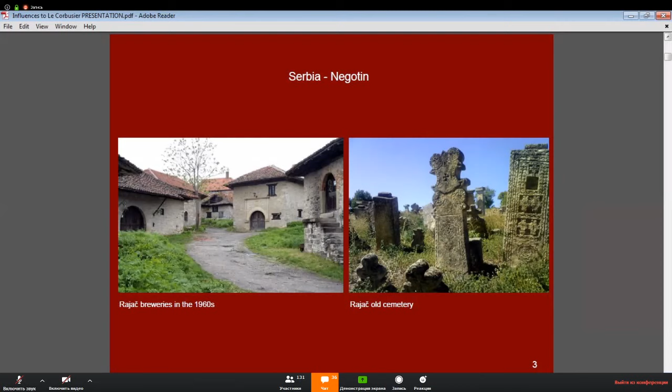The course taken by the two fellow travelers was not smooth. Started from Bucharest, they crossed the Danube on Bulgarian soil. From there, they continued by train to Veliko Trnovo, from where the railway line reached as far as Gabrovo, and there it stopped. The vertical connection that would cross the difficult passage through the Balkan mountain range had not yet been implemented.

Therefore, they continued from Gabrovo by post horses and carts, following the winding, steep, and rough road to Kazanlak and Stara Zagora, and from there continued and reached Adrianople.

Veliko Trnovo is a city on which young Jeanneret devoted numerous sketches, studying the interior layout of townhouses and making representative drawings of the city and of its historical quarter. The Yantra River winds through and around Trnovo in such a way as to make a position of great natural strength and beauty.

Let us go now to analysis of the Villa Schwab, also Villa Turk. The house is located in Le Corbusier's hometown in Switzerland. The villa was commissioned in 1912 and completed in 1916. According to scholars, the villa is thought to have been built in Oriental style, while its plan shows the effects of the Yalis layout, the traditional houses on the Bosporus in Istanbul.

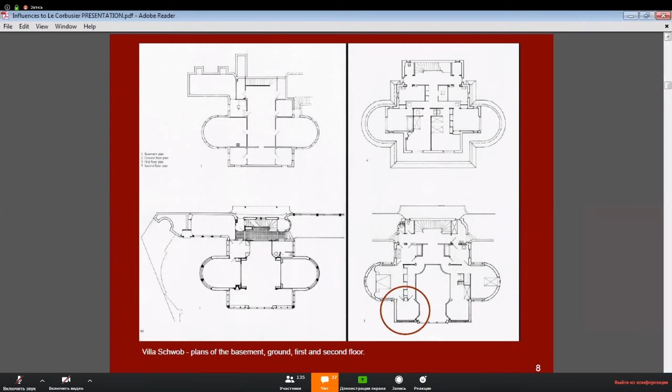On the ground floor, the central area is occupied by a two-story room. In the resulting cross-shaped form, the front corner spaces are incorporated as an extension of the living room. This arrangement brings to mind the cross-shaped plan of the developed Balkan symmetrical house as it was formed in the wealthy mansions of the Balkans and the Yalis layout in Istanbul.

Symmetrical traditional Balkan houses are distinguished by their basic tendency to group spaces around the central living room and by the functional relations among them. The main axis always passes through the lobby, and this rule contributes to the monumental character of the architecture of their interior. The cross-vertical axis acquires almost equal importance thereafter.

From a compositional point of view, in Villa Schwab, the central space is the lobby, which goes through two floors as a closed patio, forming a third axis of symmetry, this time vertical, around which closed and open spaces and various surfaces are composed. In Villa Schwab, the central space extends dynamically far to the side antennas of the cross, forming two almost open semicircular spaces.

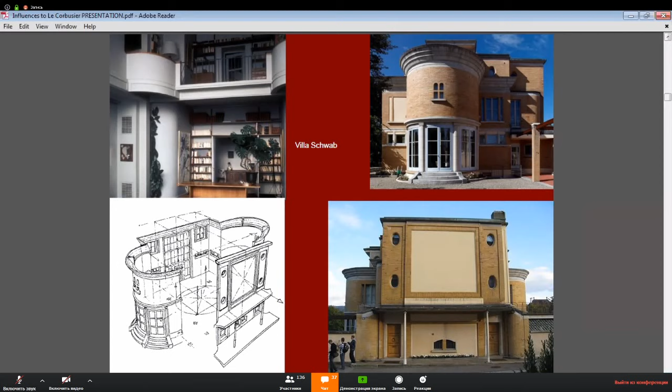Jeanneret made use of this projecting semi-cylindrical element in his first independent project in 1912, designed for his parents. Scholars highlight only the effect of Frank Lloyd Wright's architecture on these elements.

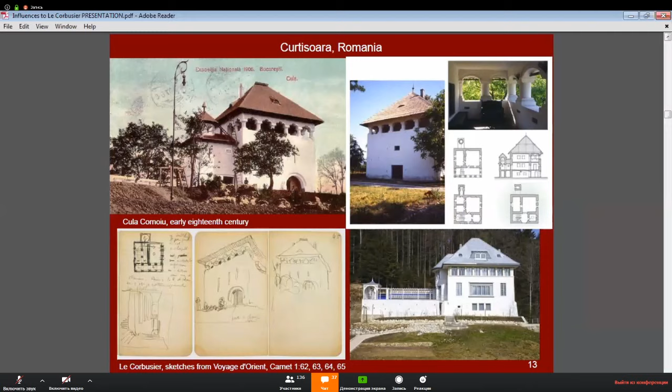However, it has been rightly observed that the effects from the Romanian Curtisoara fortified house that he visited are just as important. A parallel inspiration might have come from the series of windows that grow in a semicircular configuration and in conjunction with continuous semicircular sitting places as found in the lounges of the Balkan Oriental houses.

Let us go to an iconic monument from the Bulgarian National Revival period in which we find the same layout of the interior. This is the house and workplace of Dimos Sarafina in Veliko Ternovo. The house, for which there is no certain evidence that it was visited by young Jeanneret, was built in 1861, in a dominant place of the city.

The sloping terrain required the building to be built on the street on 2 floors and over the Yantra River on 5 floors.

The representative rooms are located on the 2 upper floors. The lobby is rectangular in shape, with beveled corners at the end of which are placed doors for the rooms. The dining room is in the middle of them, in a semicircular extension of the lobby, spread out over the wide row of windows overlooking the river. In the layout of the house, the lobby is the central room, which in height goes through 2 floors.

On the 5th floor, the ring rooms become an open gallery, decorated with a railing of wooden columns with carved iron rods. Coming back to Villa Schwab, the hermetically closed and straight shape of the spaces at the end of the corridor and in the corners of the square raise morphological questions. In our opinion, here we have the transfer of the element well known from the facades of the traditional Balkan houses, and in particular the closed shahnishin, but this time inside the living room, from outside inside. Its strange shape testifies to its origin.

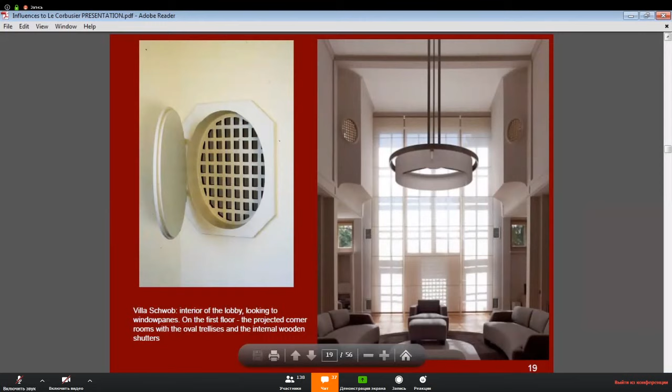The wooden musandra, a closet for the storage of night bedding, is placed at the entrance of the lounge. Its crossing is necessary to access the large room with the fireplace and the decorative ceiling, where guests were welcomed. Above the musandra is the mafil, a space overlooking the room, and when open, is the place for the musicians. However, in Muslim houses, the mafil is often closed and accessed via a small wooden staircase through the musandra from the back corridor.

Just there, Muslim women and children used to sit and eat without being seen, watching through windows covered by trellises or round glass openings the men in the lounge celebrating or receiving foreigners, or even the man negotiated for marriage.

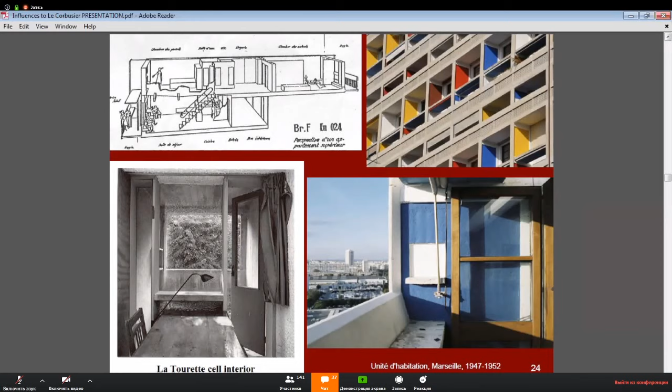The apartments, as in Marseille, show exactly the same arrangement. The monk cells at the monastery of La Tourette, near Lyon, completed in 1961, are laid out in a similar but more modest way. In another sketch, he analyzes again the relationship between inside and outside spaces, in which the staircase is getting up from the ground floor to the roofed veranda.

Kazanlak, located near the foot of the Balkan Mountains range, is the center of rose oil extraction in Bulgaria.

Kula, the ethnographic complex, preserves some of the oldest houses in the core of the old city. In the courtyard, within a garden, is a rural ground floor residence impressive with its functionality and simplicity, providing similarities with the house sketched by Le Corbusier.

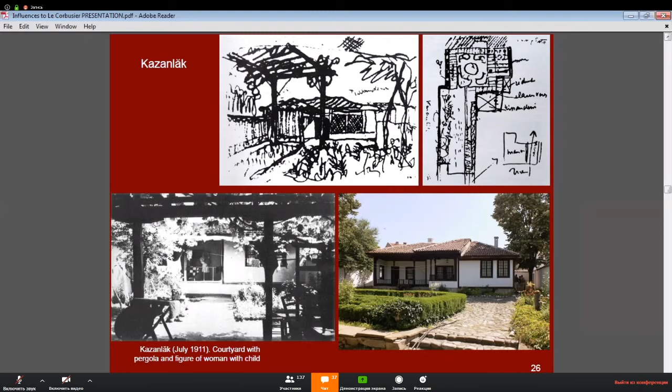The attention of young Le Corbusier was drawn to the construction methods and the form of the vernacular Oriental house of the Balkan Peninsula. In his sketch, he accurately depicted many of its basic features.

The building represents a typical structural system comprising an assembly of a timber skeleton. The foundations are made of stone and are visible. Horizontal beams are well elevated at distances along the wall. The roof structure is made of timber.

Particularly, he notes the presence of the projecting polygonal bay window on the first floor, covered by trellises to protect domestic life from the gaze of strangers. The entrance is through a large door leading to the courtyard.

A single wooden staircase connects the courtyard or ground floor and the first floor. The first steps are generally made of dressed stone blocks to protect them from moisture and rainwater.

We found this detail on the staircase at the central entrance of the elevated ground floor of the Weissenhof single-room houses 14 and 15, designed by Le Corbusier and his cousin Pierre Jeanneret in 1926, as a morphological element here.

Le Corbusier observes the relation of the street as a public place to the private and closed space of the traditional house. On the streets, the severe facade of the house appears, which, however, on the upper floor shows a tumultuous interplay, the shahnishin projecting with morphologically rich and slightly organized openings.

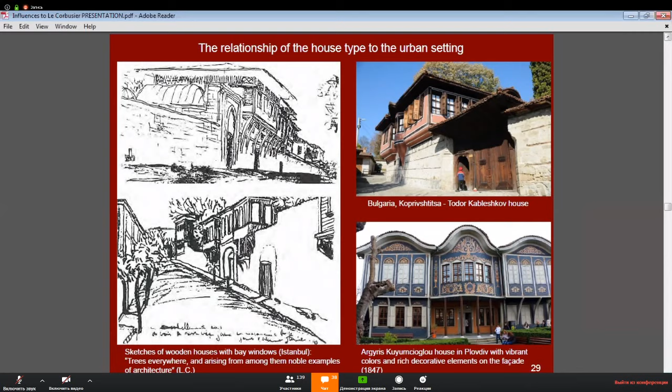Le Corbusier admires the splendor of the great houses called konaks, characterizing them as architectural masterpieces.

We would like to stress the resemblance between the house he sketched and the Kutev house in Kazanlak, a town where he stayed for two weeks, which was built by the same master craftsman who built the impressive Dimitar Georgiades house in Plovdiv.

Contrary to what has been written about the supposed whiteness of the traditional houses that Le Corbusier saw and was impressed by during his journey to the Balkans, it should be emphasized that this condition never existed to the extent that he found, and much more to the extent that it was admired by his scholars.

What comes out of his color sketches is precisely the sense of intense color that has mostly characterized the high-class representative houses in the Balkans.

Consequently, it is the Balkan and Oriental tradition of strong color use that characterizes the facades and interiors of houses and mosques.

This is where we should look for an additional possible source of inspiration for his subsequent searches and applications of vibrant earthy colors in the apartment facades at the Marseille Unité and his later architectural works.

Zagora was the biggest town in today's Bulgarian territory, but it was totally destroyed by the Turkish army during the Russo-Turkish War in 1877. Lubor Bayer was a construction technician, a master designer of the new plan of the city.

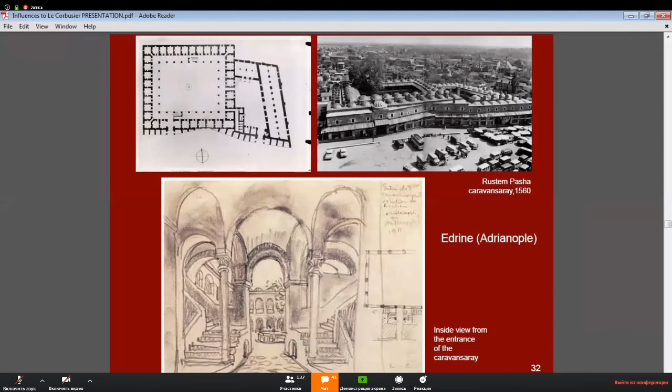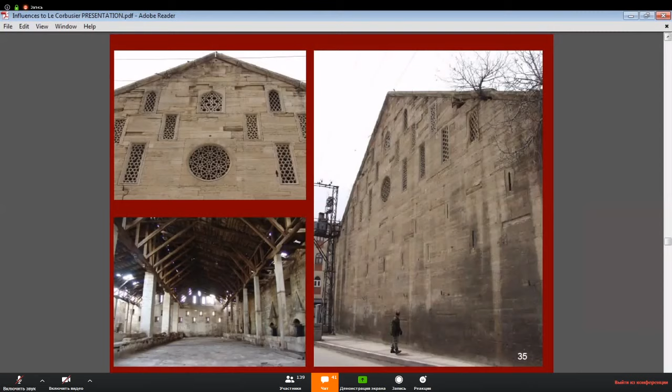We want to pay attention to the large Ekmekçioğlu Ahmed Pasha Caravanserai, built by order of Sultan Ahmed I, designed by the same architect responsible for the Blue Mosque in Istanbul. The structure has two separate wings connected by a central part. The interior of each wing is quite dark, illuminated only by windows open to the walls on the narrow sides. The large east wall gives the impression of a heavy, dark curtain pierced by narrow strips of colored light, allowed to pass in controlled quantities through the colorful windows.

The overall picture inside the caravanserai is so striking that it gives birth to the idea that the young Le Corbusier is likely to have noticed this impressive interior atmosphere. It is possible that this image came back to his memory when sketching the famous perforated wall in Ronchamp Chapel after a whole 40 years.

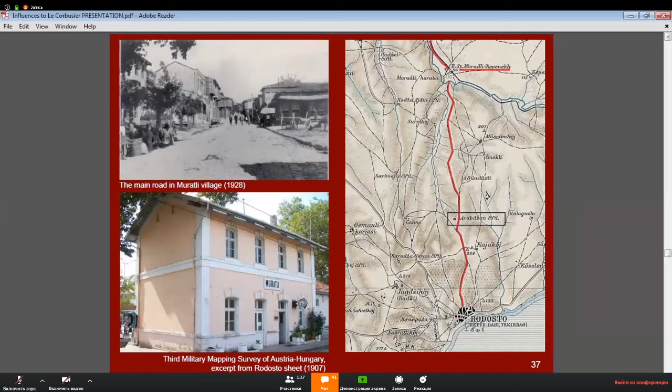The Ottoman railway line was starting from Edirne. Muratlı was a small railway station, but of importance, as from there a 22 kilometer long road led by the shortest connection from inland to the Marmara Sea, to the port of Tekirdağ, the second big city in Edirne Vilayet. Jeanneret and Klipstein, on their way, passed by a Turkish chiflik, dominated by a tower house.

The property was bordered by a wall all around. The residence was surrounded by a high wall fence consisting of the exterior walls of the auxiliary buildings of the complex. The main building was a big kula, a defense tower. The image of the fortified residence impressed young Le Corbusier, who had it drawn and visited the yard interior.

A much better picture of what these complexes represented we can acquire from old photographs of identical chifliks that existed in the same area, found in the Russian Army's archives of the Russian-Turkish War of 1877-78. On the first photograph, there are visible box machicolations of supporting corbels of the upper floor. The second photograph provides a closer picture of the only entrance to another chiflik, through a gate well protected by a guardhouse. Certainly, both are similar to what young Le Corbusier saw on his route from Muratlı to Tekirdağ.

The chifliks were located near Küçükçekmece Bridge. The second photograph presents the San Stefano chiflik. The photographs were taken after the Treaty of San Stefano, July-August 1878, during or shortly after the end of the Berlin Conference, before Russian troops withdrew from the area.

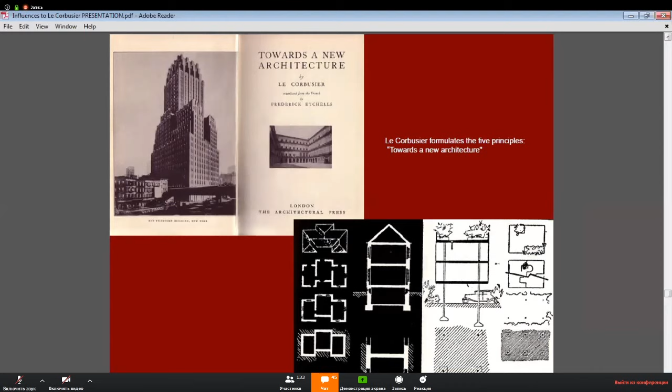However, some of the qualities of his 5-point manifesto could well have been formulated during his early journey to the Balkans. The concept of the prolonged unified window, opening widely and indivisibly to the view, used to be a constituent element of Ottoman secular architectural morphology.

The oldest surviving example to date of the famous Yalı houses is the assembly room of the men's quarters of the Amcazade Hüseyin Pasha Yalısı, constructed to house the Austrian ambassador after the Treaty of Karlowitz, as early as the very end of the 17th century, supported on wooden pillars over the sea waters. It provides unobstructed views towards the Bosphorus through strip ribbon windows placed in a row at the eye level of a person seated at the window-side sofas.

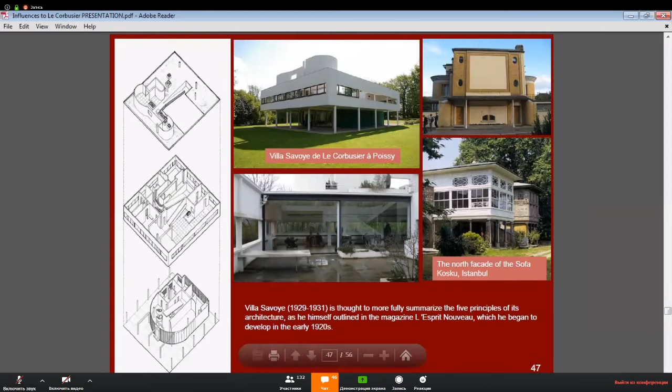Scholars have long observed the widespread use of elegant wooden pillars in the traditional wooden yalis of the Bosphorus, on which the living room extends out of the main volume of the mansion, lifted above the ground plane. The impression is further enhanced in the imperial buildings of the Sultan's Palace in Topkapı. The north facade of the Sofa Köşkü provides a brilliant example of the realization, by official Ottoman architecture, of both construction methods which will be among Le Corbusier's modern architecture basic principles.

The setback arises from the need to build in correct geometric forms, to expand the floor area and to create conditions of better functional organization of structure and aesthetics of the premises.

It also visually connects the house to the street. Extending well beyond the ground floor, a bay window hangs over the street, allowing householders to observe the entire length of traffic through side windows.

The bay window is also of great importance in shaping the architectural picture of the whole ensemble on the street and the city. The houses involved provide first-class examples of projected bay windows in successive rows on timber construction buildings.

Similar examples of bay windows should have impressed Le Corbusier in Istanbul as well. Consequently, these examples should have influenced him in designing the large-scale projected bay windows for the facades of La Tourette convent near Lyon, and also the effect of turned sideways windows as brise-soleil in the Marseille apartment buildings and at the Carpenter Arts Center at Harvard University in Cambridge, Massachusetts.

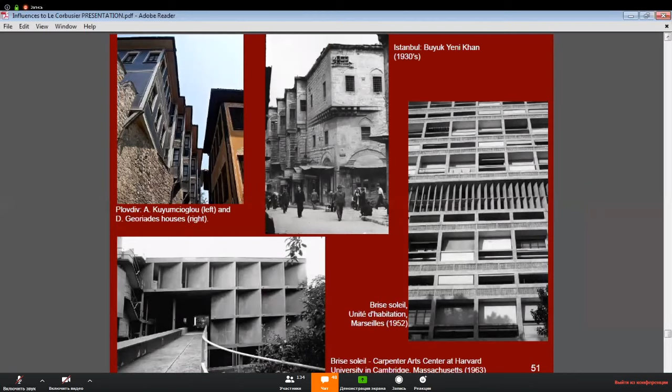In Istanbul, he was very much impressed by the gigantic Ottoman monuments and devoted much of his long stay there to visiting and studying them. He stayed about 7 weeks there. I will stop my presentation with this example.

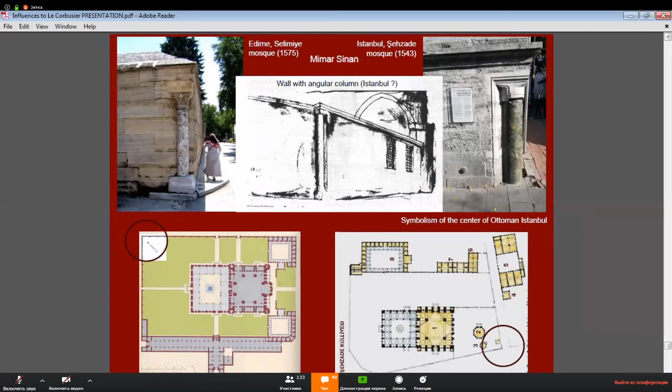These columns did not have only a symbolical meaning. They also had a high technical use because they were free to move all around, and it was a very bad signal if this moving was not able to be realized. That was a signal of an earthquake, and they had to take care of the building.

It was an old technique used in Ottoman architecture, and we see it in another early construction of a mosque in Edirne from the mid 15th century. What is very important here is the assumption that the angular column most likely inspired him to place an iron pillar, which offers virtually nothing from the static point of view, at the corner end of the ground floor building in the Villa Ternisien, another one of his early works. So the similarity is remarkable.

Conclusions. What we have tried to suggest in this presentation is a different interpretation and perspective of Le Corbusier's observations and influences through his journey to the East, a perspective that acknowledges the need for a deeper analysis of the specific historical and cultural environment that Le Corbusier came in contact with in the Balkan region.

This kind of analysis is necessary to understand which elements were selected as more interesting and influenced his later architectural creations, since the Balkans represented a different, more exotic and unknown cultural reality than the one he encountered in the European capitals. It is striking that young Jeanneret was so deeply impressed by architectural elements and compositional relations of the traditional houses of the Balkan Peninsula that he attempted to introduce them, either as synthetic principles for the layout or as individual morphological and structural elements, even in his first architectural creations following his return home.

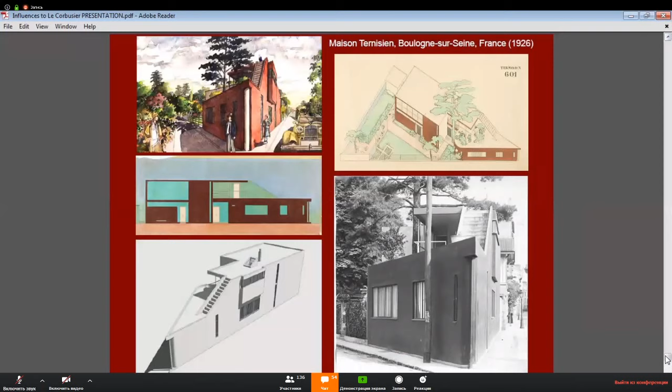So the first question is: can Le Corbusier's ideas be used today, and how can they be reformed? Thanks for the lecture. So how can his ideas be reformed and used today?

Of course, he introduced revolutionary ideas for his time, and their method—the way of seeing relations and space—guides our studies today. What I try to analyze is the influences, why he selected exactly these elements, and how they were later introduced into his work.

Okay, thank you. The next question: what project of Le Corbusier shows the most principles of architectural space from the Balkans period? What projects show the most principles?

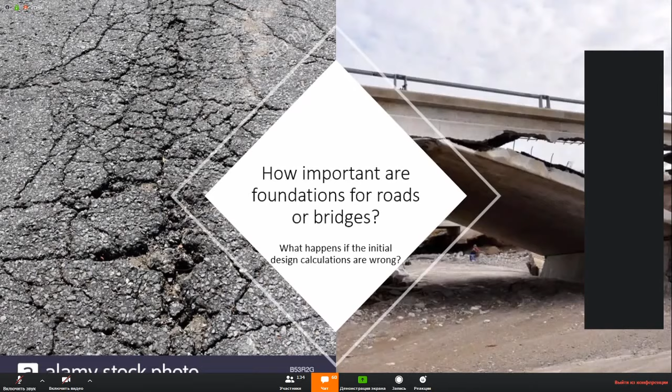Typically, as an engineer, we're looking at the modulus of the ground. People will take a CBR reading or go for a modulus reading. In a road, more than a bridge, it's extremely critical to get the CBR or modulus correct—without it being correct, there are technical failures that are impossible to determine.

Over the years, axle loads on roads and bridges have increased significantly. Although the road, and to some extent the bridge piers, are designed to transfer the load down into the ground, if the design of the ground or subbase is incorrect, the load can't transfer correctly. That's why you see an awful lot of failures in the road, such as rutting, and in bridge decks you'll see cracking and other things appearing.

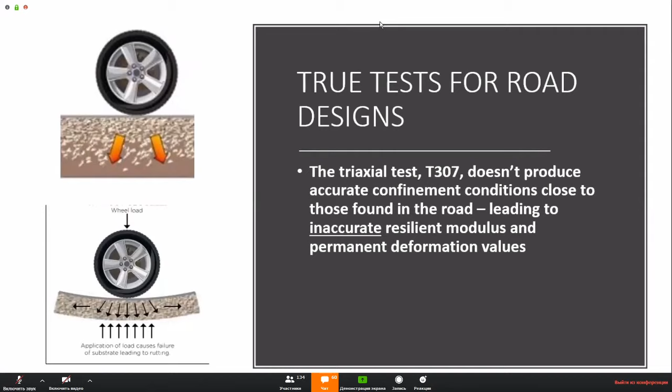Typically, in Europe especially, we tend to use a triaxial test rather than the physical CBR. We tend to do calculations rather than based on theory. But even then, the resilient modulus has been incorrectly calculated because of the equipment we're currently using.

In a road, you'll see that creates a rut. In a bridge, it creates problems with the foundations. We used to notice it especially where the bridge abutment met the approaching road. Any settlement beyond the calculation left a difference between the two levels, and it changed over a period of time. So as an engineer, it became a historical problem of how we could correct this design.

There is a machine that was really designed at Cooper Research Technology, called an unbound material analyzer. It's basically a machine that is designed to replicate real conditions out in the road.

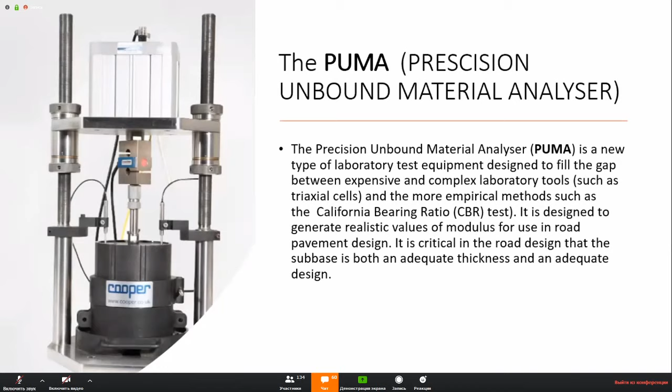It's very simple, very small, 150 mil diameter, bigger than a CBR mold, and different to a triaxial mold. It's putting a universal testing machine with pulses to try to replicate what actually is happening in a road. A CBR is just a single load. A triaxial also uses pulses, but the Puma gives pulses to act as though a wheel is going over it. These different sizes of machines depend on whether you're using larger or smaller material.

The main difference is that in a CBR mold, the mold is solid. So when you're compressing, the side of the CBR mold restrains the actual movement of the soil. This is not real in the industry. If you go out in the field, the ground is not restrained.

As a quick example I use a lot, it's like an orange. If I press the orange with the orange skin, the resistance I have is very, very large. If I remove the orange skin and press again, it compresses and also expands out. So research was done to make a mold that either expanded that way or that way, depending on the load and the contents of the ground.

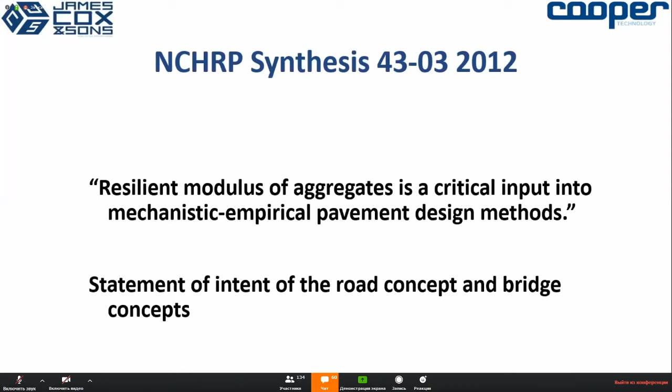The statement from the American system was that the resilient modulus is critical, and therefore it has to be correct because it's part of the pavement design and part of the bridge design. So with those bases in mind, we had to carry out the project research.

Rather than talking about a road and a bridge, for now I just want to talk about a road, because the analysis is the same, but the research gives different results, and on a road it's a lot easier to see the results than actually on a bridge deck.

We asked a lot of designers, mainly in the United States and the United Kingdom, how they determine the resilient modulus or the CBR value of the ground of our road. We got a series of different answers. A lot of people told us they use CBR. It's a simple formula they took from a chart on a paper.

Some of them also took resilient modulus in the laboratory, which is basically a triaxial test. And it was interesting, some of the designers were using both of them. Yet when they used both of the answers, they had different results, and that affected the design parameter.

I had this problem on a bridge we were designing in Thailand, and we finished up with an engineering team in Thailand working on a CBR, and the design team back in London working on a resilient modulus, and we had a variation that actually caused complication in the initial design.

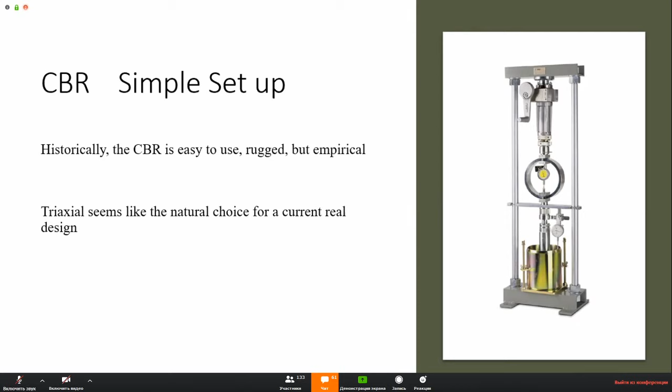So a lot of people moved from CBR to a triaxial test because it was supposed to be more real than CBR. A triaxial test is, as you can see, extremely difficult to do. It's very complicated to put together. As a nature, it needs a technician that knows what he's doing. A CBR test, anybody can really do very quickly. A triaxial test is, by nature, a very difficult test to carry out.

With the United States, we were doing a resilient modulus test with the triaxial because they wanted to analyze what was going on, and they were very specific in the pulse loads and very specific of how we actually loaded it. So the AASHTO version and the EN version were, for us, different, and we had to design machines to operate in both.

When we finished it, we found that there was a lot of difference between state of the art and practices of what was going on. The resilient modulus is a critical part of a design. A lot of it's been around for a fair period of time.

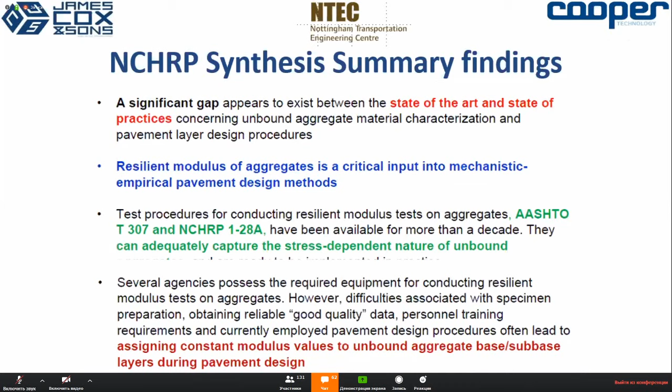But the biggest problem we had was that although people had the ability to do the tests, they had significant problems with the data, with the personnel training, some of the country requirements, and they found that the tests were not uniformly carried out, even on the same material. So two laboratories would have a different result on the same material than another laboratory. So we had to analyse what was going on, because we still have these road failures.

Of course, we looked at the factors that affect the road, sub-base mainly, and of course the primary factor is the applied stress, the lorries, the cars, the traffic that's going over it. But we also spent a lot of time analysing the densities, the fine contents, the moisture contents. And in the colder countries, we had to look at the freeze-thaw effects.

Russia especially was going to have the same problem. Not so much here in the United Kingdom anymore, and not so much in the United States with Florida and everything else. But we had to look at it as a factor. So we did the research behind it.

And what we found was that a lot of times the confining stress was never less than 20 kilopascals, which historically gave us a higher modulus of stiffness, rather than if we did it by another method, such as a falling weight. So we had to research into what we could do to overcome this particular problem.

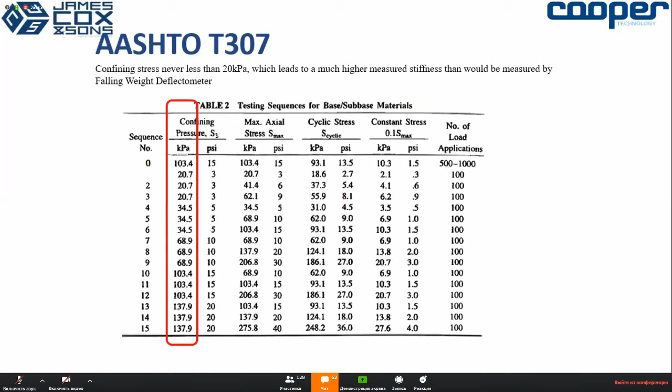Of course, we finished up with the question, how important is this unbound layer? So we chose two examples. We chose a thin asphalt, 100 mil thick basically, and we chose a thick asphalt, 200 mil thick. And we varied the base modulus. We were curious what would happen in the different traffic areas.

On the calculations, the predictions came out. We used a base modulus of 1,000 to do the initial calculations. A thin asphalt layer of 100 millimeters with a 1,000 megapascal base layer was very weak. After 380,000 passes, the asphalt was already failing. A thicker asphalt, because of its nature, we could get 20 million, but it was based on that assumption and that calculation.

We did the graphs based on the presumptions that we calculated to work out the fatigue life of the thin and the thick asphalt. Clearly, the thick asphalt's fatigue life is a lot bigger, a lot longer, depending on the stiffness of the modulus, because it's twice as thick as an asphalt layer. But we have the curves, and these curves were from calculations.

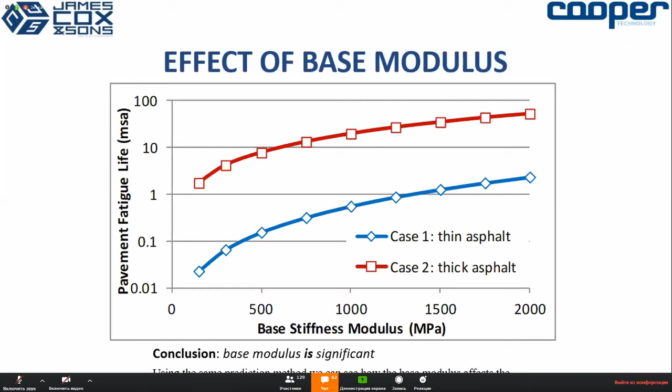So we wanted to check the overall fatigue life. So we increased the compressive stress, and we calculated the compressive stress against the horizontal stresses using the different moduluses. Don't forget, these were all based on calculations, based on a triaxial test or based on a CBR. So we were curious what the results were, and we finished off being able to plot the graphs. Of course, the thin stuff is very weak.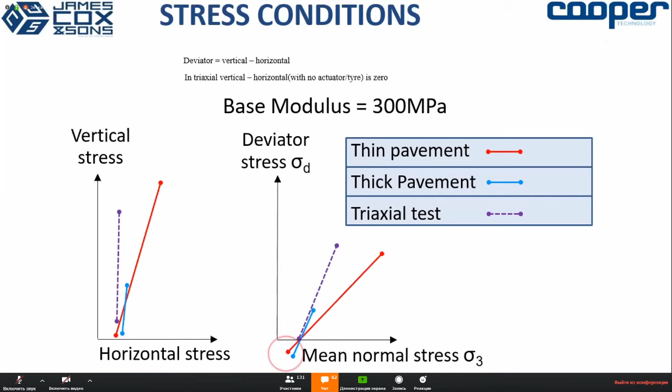So we then put the Puma, the precision unbound material analyzer, to the test. We wanted to check a thick and a thin layer to see what actual stress we were creating during the test as against our calculated stress. Straight away you can see the difference in vertical stress the Puma was picking up, because the Puma is no longer bound by the side walls of the CBR, and by the nature of the triaxial test it's allowed to freely move. So the vertical stresses, especially on the red thin pavement layer, were significant as the load was increased.

By the nature of the calculations, we had to build in a factor of friction for the mold. 0.5 was historically chosen as the nature of the mold. So we needed to check the difference between a mold with a coefficient of friction and an unbound mold such as the Puma.

So we finished up with the same graph, but with the Puma results. You can see the Puma results differ from the triaxial results and from the calculation results. This became really important in the actual design of the road, because using the equation from the triaxial test and looking at the various stress layers, we found that we were using, as a designer and for me as an engineer building it, incorrect data. With this incorrect data, the abutments at the bridges had a tendency to not be as we initially thought in the design, and as a road we have, and always will have until it's corrected, significant failures.

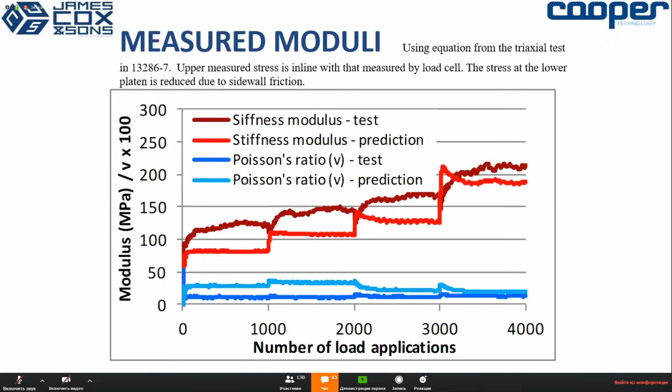When we corrected the stresses, you can see the red is the thin pavement and the blue is the thicker pavement. When we corrected the stress calculations with the results from the Puma, the results were dramatically very different. Thicker pavement, which people don't theoretically use anymore, was okay. When people went to a thinner pavement, the actual vertical stress measured against what was calculated showed a significant difference, which would really alter the life of that road. So we had to correct the modulus.

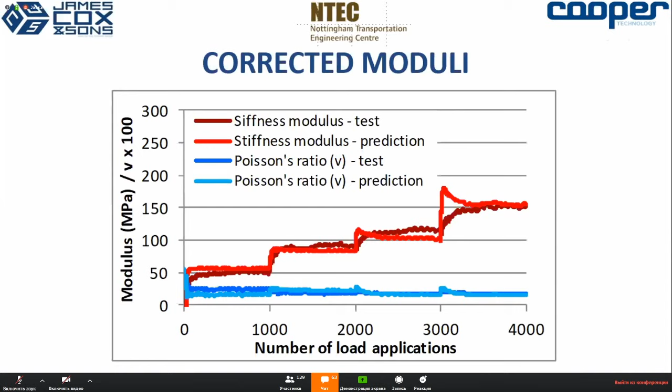Again, in the calculations, we used the predicted load as against the tested load, and we found that the variations were evened out a lot more once we used the Puma. So with the Puma, our predicted load and our tested load became more accurate.

Just to compare the modulus, the triaxial test that people use, confinement is important to road designers. Suppliers of aggregates for roads, especially on thinner pavements, would like a higher value, so they prefer these results to be higher. From the calculations, they were predicting 157 and 95 in our design loads, but if you look at the test results, the actual modulus was lower, and the triaxial load was given a higher modulus. So for an engineer designing this road, the data we were receiving from CBR, predicted values, and triaxial was actually incorrect.

When we used the Puma, we could then change the actual load amount against the stress, and we could increase, therefore, what was going on in the road and get a much more accurate road design.

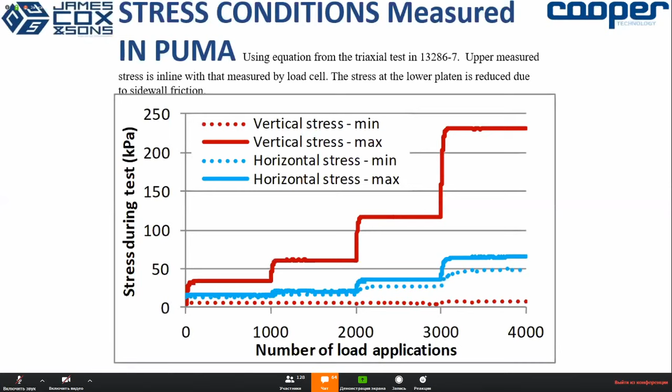An example of this is in the United Kingdom with railway ballast. We put large stone underneath the railway tracks. The same machine is being used to test the ballast for the new HS2 railway, and they found that the calculation was incorrect, so in actual fact they could reduce the thickness of the ballast on the railway line, which gave a cost saving, especially over 300 kilometres, of a significant amount of money. But they could only do this by taking a real test, not a calculated one.

There is a YouTube video so people can watch. That's the machine, a very simple, very small machine. It takes up very little space in the laboratory, but it's a quick way of doing the test now. It's a very, very simple test.

With the national highways in the United States and their tests, they use this Puma, and I believe in 2021, now it's delayed because of the virus, they are going to put an unbound test as part of the ASTM standards.

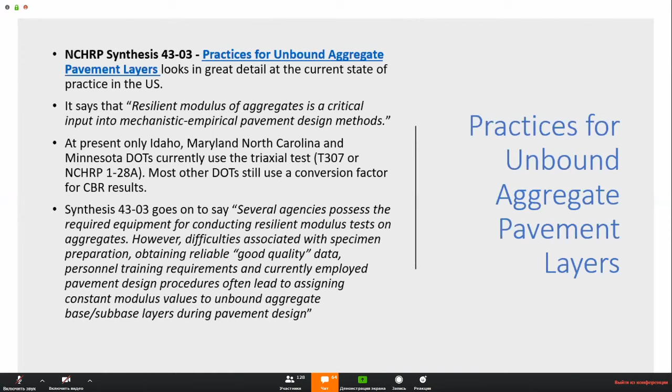So we concluded after a lot of research that the modulus of the base pavement is important. It depends on a lot of different stress conditions, but when you use an analytical pavement design, they have to be correct. The end result of all the research with all the laboratories was that we had to basically change to an unbound material analyzer, and rely on the Puma, because we needed more accurate modulus values than you can get on CBR and more than a triaxial.

It allows the road to be designed so it can actually be either thinner in base, or if needed, thicker, depending on the actual results given from the particular site. Same issue on a bridge deck, where the bridge was meeting the abutments and the runoff tracks where the expansion joints were. We therefore began to understand why the ground was moving.

Very quickly, other people have taken it on further and done research on the Puma. This one was done over in the Chinese zone. Again, they got different loads. They were checking the results that they received compared with the results that were expected, and they got very different results that they needed to repeat.

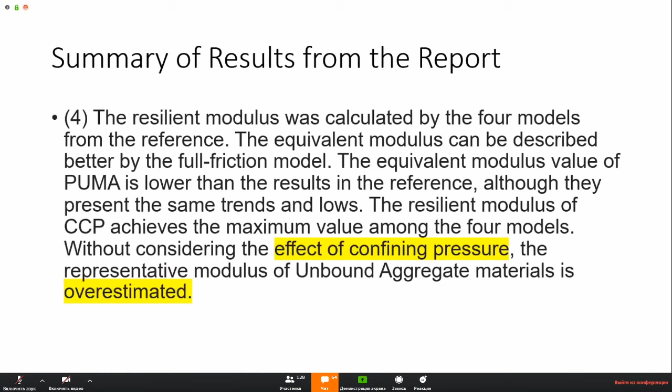They came out with this particular result: you have to consider the confining pressure when designing the unbound aggregate materials. You can't just rely on a triaxial, and you can't just rely on CBR. That's why roads have a problem at this present moment.

I mentioned the railway. This one was done in the United Kingdom with AECOM, Nottingham University, and a university over in Palermo, where they used it for rail tracks both here in the United Kingdom, and they're also looking at rail tracks in some other countries using the same type of prediction from the Puma.

Again, the paper said, basically, the results are correct, it's reliable, it's easy to use, and it gave a cost saving for the particular industry.

Basically, in summary, with an unbound material analyzer, we actually got accurate results now to design the bridge and to build the bridge and the road. It has significant difference when we're designing the durability of the road, because we have real results of every area.

In some recent roads here, we've actually done analysis in different areas. So we don't just say the road is 10 kilometers long, we'll actually analyze every 500 meters, because the nature of the ground does change. With the machine, it's very quick to do.

The test takes a little over an hour, and we can quickly check as we go along each section of the road and what's going on. We can reduce the road thickness in some cases, or if we have to, increase it. The main criteria in a road, especially, is to design to reduce rutting and stop it. And it's very cost effective to use.

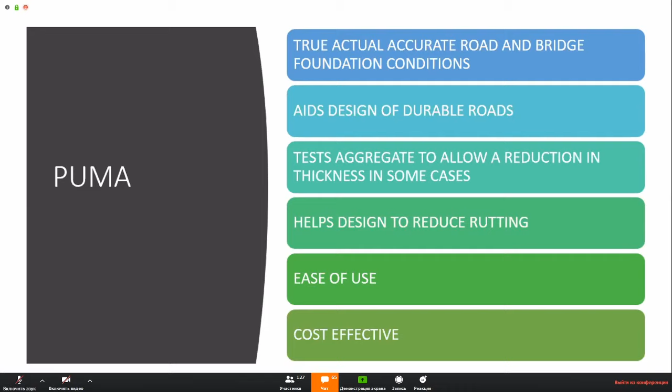As I said, it will be the new ASTM standard. It's supposed to be 2020, but unfortunately the virus has got in the way, so basically it's delayed for about a year.

So that's the Puma. Working on it. It's great.

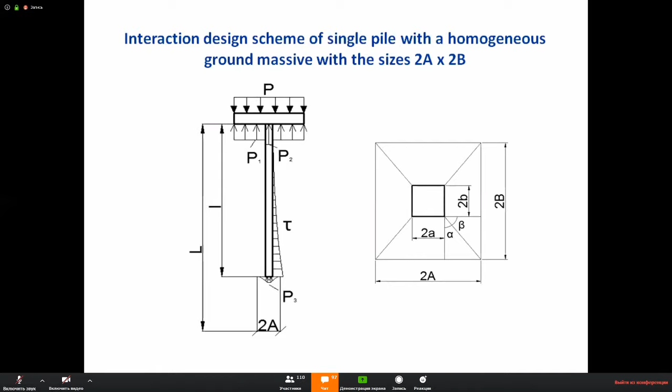To solve that, it is necessary to find the four unknowns: P1, P2, P3, and tau 0. Using the force equilibrium equations on the pile and the whole cell, and equality of movements of ground at the heel and top pile levels, we obtain a system of equations.

The solution of the system allows us to find the settlement value as well as the stress arising in the pile trunk, in the ground under the raft, and in the piles under cyclic loading.

Limit equilibrium zones, taking into account the rigidity of the pile material, are determined by the mobilized shear stresses tau n and the shear stress limit diagrams at the interaction point, which can be calculated by the formula.

Where Cn is ground cohesion, and under cyclic loading it is taken into account by the formula. Depending on the pile length to heel level, we account for different shares of the load, since in the case of increasing the length of the pile, the lateral surface area increases.

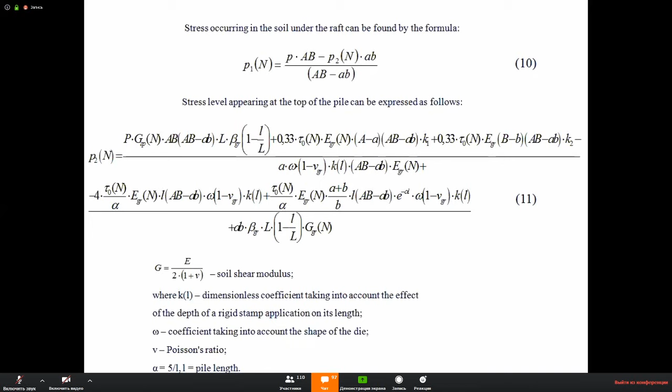Stress occurring in the soil under the raft can be defined by the formula. Stress level appearing at the top of the pile can be expressed as follows. Stress under the heel of the pile can be calculated using the formula.

Shear stress tau 0 n can be expressed as follows. Plate pile foundation settlements can be calculated by the formula, where SEFN is the conditional foundation settlement, delta SPN is the additional settlement value due to punching piles at the level of the conditional foundation soil, and delta SCN is the settlement due to the pile shaft compression.

The conditional foundation settlement during cyclic loading, taking into account the volumetric ground stress strain state, can be determined by the formula.

The additional settlement value delta SP due to punching piles is determined by the formula.

Settlement due to the pile shaft compression is determined by the formula.

Improved methods for calculating ground-based settlement and bearing capacity take into account change in the stress strain state of a plate pile foundation and increase in deformation stresses and effects, as well as their redistribution between the ground and piles during cyclic loading. Determining the influence of cyclic loading on plate pile foundations in the future will make it possible to obtain more profitable design solutions for the construction of buildings and structures on this type of foundation.

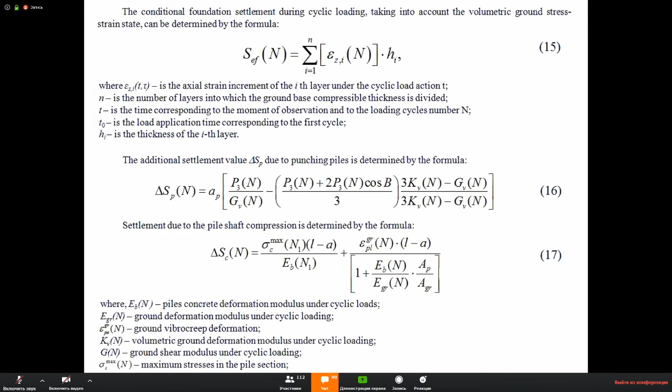Okay, thank you for your attention.

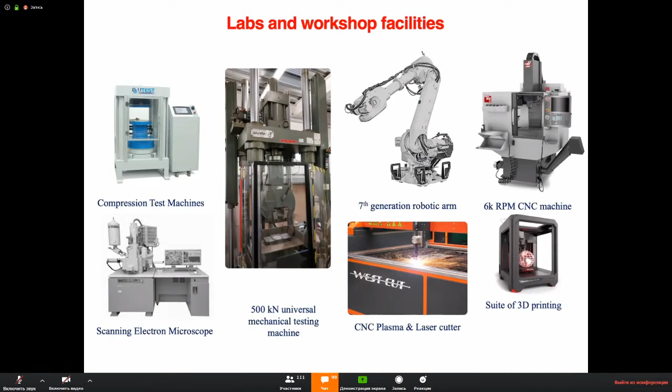But what I'm going to show you is the place of architecture in this new framework—which is the role of us as architects. As architects, we are building buildings, and this is what I've done most of my life: research to create frameworks for people to inhabit and be enhanced by these buildings.

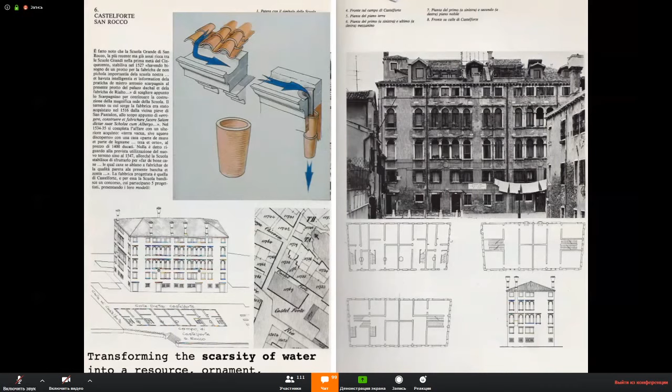I come from Venice, which was a smart city at that time because of the commercial connections created through its ports, and because of specific construction that allowed an artificial condition—a machine to make life possible in a space where there was no water. Water was collected through the houses and small squares, enhancing the possibility of living together, from the small scale of the building to the big scale of the city.

And there is a continuity, because these campos and piazzas are wells, for sure, but they are also places where people connect, places where people create a sense of community.

Going from these examples of our past to examples of the future—what are we working on, as C+S, with research and at the university, as architects? We try to question the role of public buildings. We think an innovative reconsideration of public buildings and their role within cities and communities can provoke different ways of planting seeds for a better future.

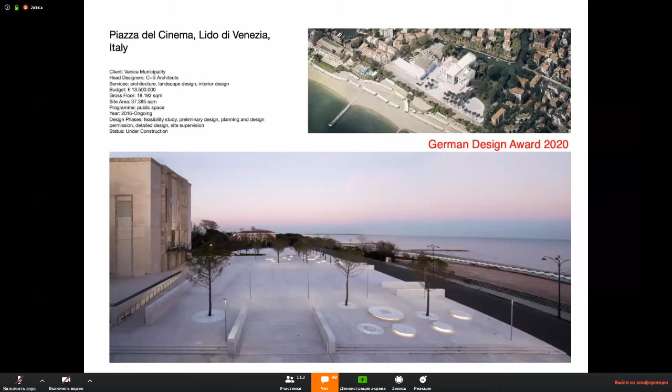We work against the idea that public buildings, because they're monofunctional, are sometimes more private than privately owned ones. This is why we developed this theory with the law court office in Venice, the restoration of a mall that became a public space, a water filtration plant turned into a park, or a piazza designed just for the cinema festival that became a beautiful public space—where a slight architectural intervention can create very open, multicultural places for all people.

But what I wanted to talk to you about is our special focus on school buildings. Schools are very monofunctional buildings.

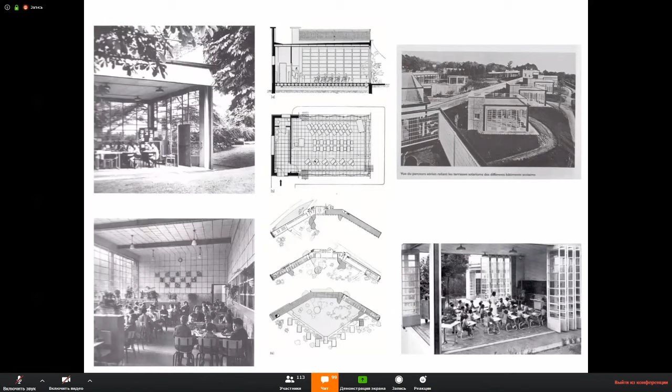They have been benchmarks in new residential developments in the 20th century, playing a significant role parallel to churches in the past, with Dudok's examples we all know, and developing the idea of connecting to the landscape, where schools first started to go outside with open-air designs, testing new technologies and creating new relationships between spaces.

We also think of the famous Terragni school—this is why we've defined a kind of school manifesto, looking at schools and their very specific programs, trying to make them hybrid, open after school hours, energy efficient as manifestos of energy possibilities, and a place where it's possible to engage with the community.

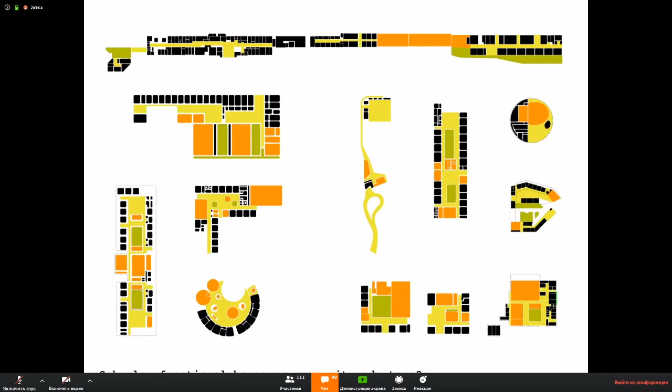So auditoriums, canteens, gardens, special classes for science or art, etc.—if we consider these openable after school hours, they can become really important community centers.

We didn't only define this theoretically, but applied it, winning competitions and building real projects. These were built, and we pushed the Italian government to change policies for school buildings—and we achieved that. Now every school built in Italy is built under regulation to become a small hub, open to the community after school hours, with a special program open to that.

For example, this is another primary school that also houses the public library for children. So at the end of the school day, the children don't go out—other children come in. It's kind of an interior square for the sprawl city.

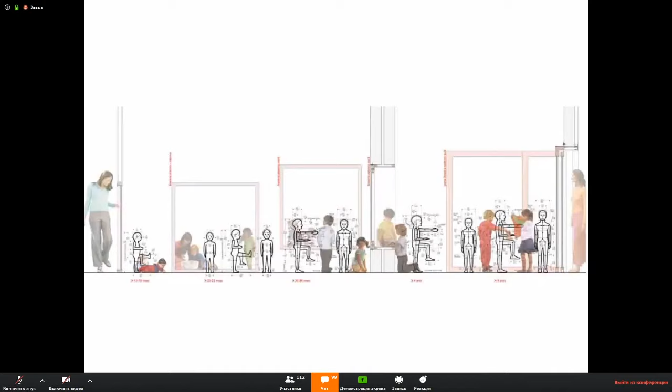Intervisibility is also a very important quality for this condition, because the students are looking and copying one from the other. The fact that it's open after school hours, as I told you, there are a lot of functions, and it's porous. The community can go in.

For example, in the school that I've shown you before, the community around is organizing. They're using the school on weekends, organizing parties, barbecues, and using it for birthday parties.

This is another one, in Ponzano, near the Benetton factories. Again, it has all the conditions I told you before: the gym, the art labs, the canteen, the square, the garden are all open after school hours, and the school becomes very porous, very transparent.

Everybody is welcome to inhabit it. We have created a small botanic garden also on top of the roof, and this is a place for the kids to experiment.

The classes can also be opened outside in these porticos, in order to create different conditions of leaving the classes, not only the conventional class, or they can just take the benches outside to do special classes.

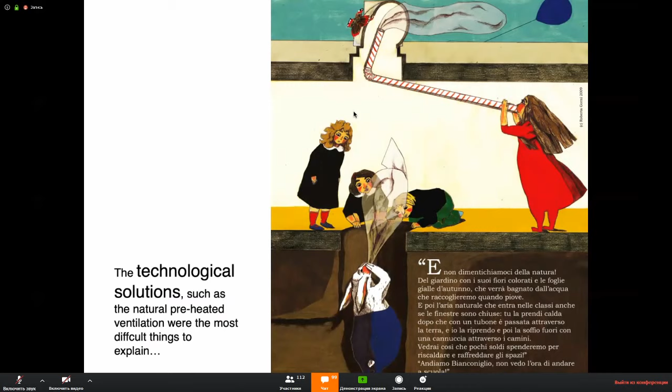Then the air is piped out of the roof. They can see these chimneys in the roof, and they can see that this technology, this way of making a sustainable green roof with preheated ventilation in the class, is something they can touch with their hands. So it's a story, but a story that also tells what is physically there.

And obviously all the other conditions for sustainability, which are photovoltaic panels, the collection of water to water the garden and the roof and flush the toilets, the portico which allows a sort of screen to the sun but also allows the entrance of light directly during the winter, and the geothermy as well as this preheated air, all allow this school to consume like the kitchen of your house.

And this was really a good, successful example, especially because the cost was very low. It was in Italy, around the cost of construction of social housing.

And not only this, what we have done is we have told the story of the building of the school through the construction of the roof, borrowing from Lewis Carroll, Alice and the White Rabbit, and telling this story among the children to engage with the community.

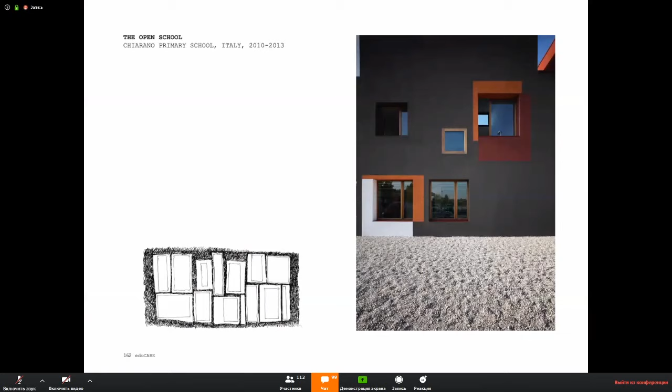For Chiarano, we wrote a theater play, and then let me see if this works, and then we put that in as an act.

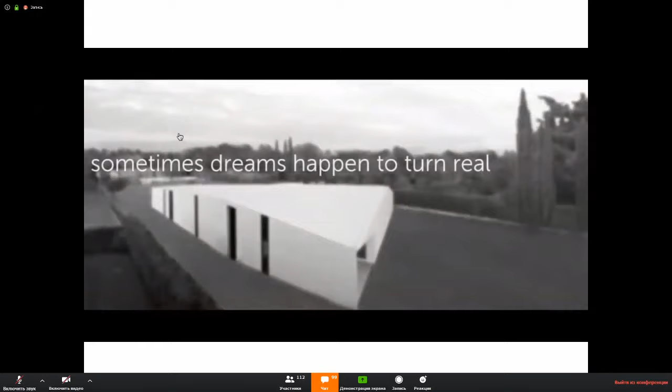And this story was about why it's not working anymore. Yeah, and this was a roof that was protecting from the sun.

This school did not have the necessity of having any thermal coating, because the calculations made it energetically sustainable just with the thick concrete wall and then a series of other technologies, like photovoltaic panels, geothermy, and other things.

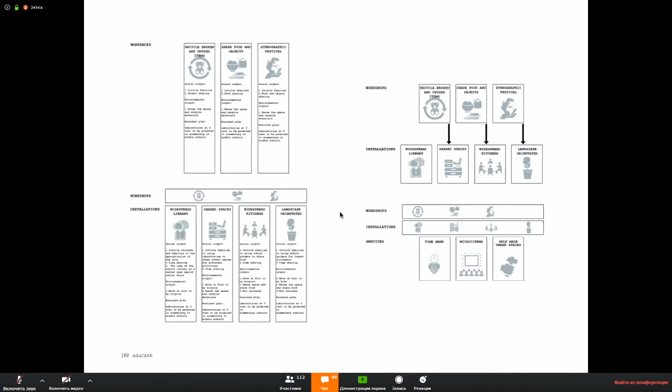But what was really important is that we created some tools for which the community could engage and become a kind of open school, also for kids who were not able to pay the fee, because the owner decided to make it a community-friendly school and engage people, asking them to offer their time and work to allow the kids to join that community.

But this thing of the school, which looks like a very simple and building-centered approach, is in fact a possibility, a potential of creating a network, which is already there, to make the city itself connected through safe routes, cycling routes or other soft routes, which connecting the schools can make the kids independent, can allow to specialize these nodes, and maybe also reduce pollution.

So this, which looks like a very simple and small approach, is in fact impacting the cities themselves. And when we work with our students, I have added a series of student projects which were, in our opinion, quite interesting. We allow them also to have this approach.

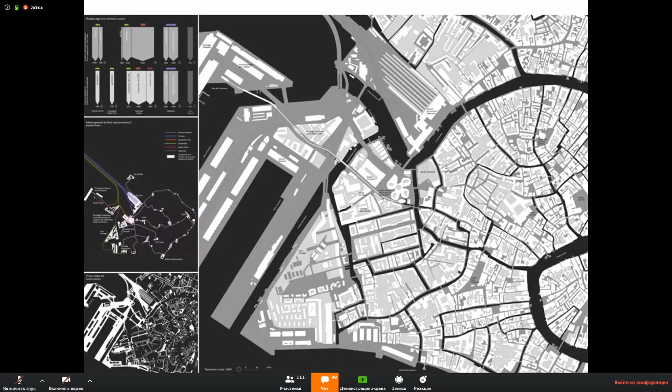These are some parking terminals, but which we have hybridized with other functions like malls, museums, etc., in the center of cities like Venice, where we try to create these conditions of overlapping networks, of overlapping different infrastructures in order to create, again, a sense of community.

The structure here from this student is quite interesting because it was a re-elaboration and reinterpretation of some fundamental structural features of the Gothic in Venice, but retranslated into contemporary modes and forms for this bus hub, parking hub in Piazzale Roma in the city of Venice.

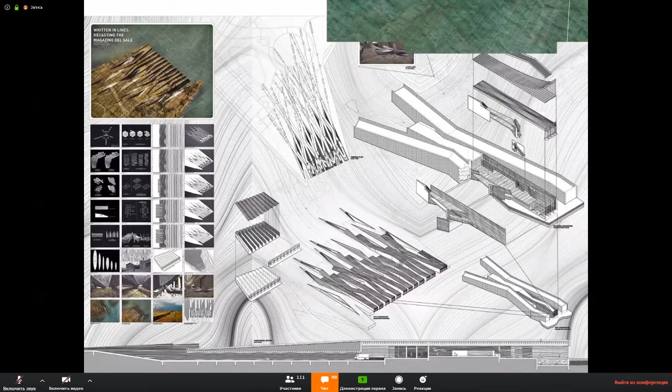You can have a look at the different quality of presentation, models, beam, and the different structures and super detailed design. This is another project which was a hub, a parking hub, an intermodal node between the mainland and the lagoon, turning into a landscape project, a museum, and a parking itself.

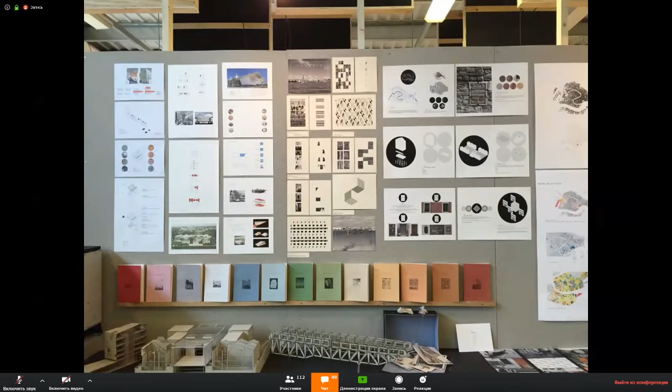This was the same topic, but developed by another student. And you can see that all these projects go to the last detail of construction. There's a lot of research, a lot of contextual understanding of the community and the potentials of that space, and turning them into this hybrid approach that we develop in the research themselves.

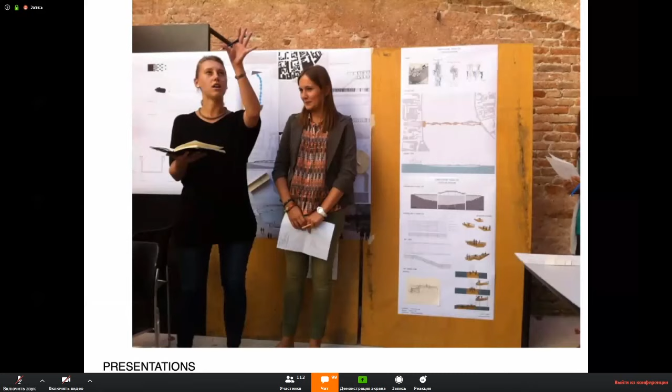Our students obviously are exposed to important trips, to beautiful cities, to workshops that allow them to make projects that then are exhibited in the Ducal Palace in Venice. This was a small pavilion that was built by master students. Another one in Milan. In London, again, on-site construction and the construction of a pavilion by other colleagues. Furniture, and also the learning skills of presenting their work and being upfront to show and be proud of their work.

And this is all because we strongly believe that ours is a collective time, that we can talk about data, smart cities, but the center of everything is the users. I've added these great words to Lina Bo Bardi's work. And the work is not of a single person. We are teams, we are communities, and only then we can recover the joy of moral participation in work and then in life. Thank you very much.

What is this? Okay, I'm here.

Thank you very much, Maria, for that interesting presentation. We have received, I don't know if you see or not, in the chat box, a lot of questions. We will not ask all of these questions, but we will ask a few of them. And the first one is: what is the main concept for creating school spaces? How does space and the teaching method approach interact? How do these things interact?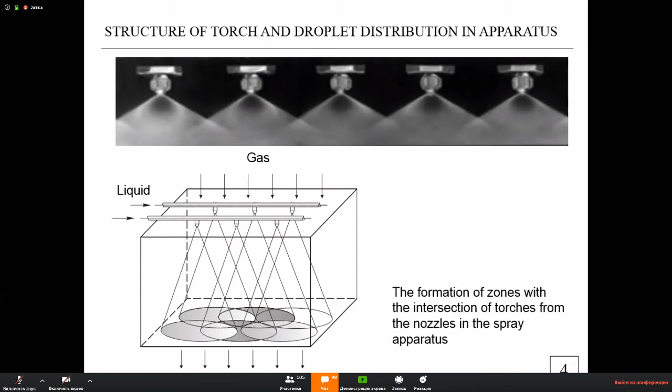It's time to switch to monodisperse sprayers, among which the class of porous rotating atomizers stand out. The design is simple: a hollow cylinder of porous material into which fluid is supplied rotates at high speed via an electric motor. Due to centrifugal force, the liquid is filtered to the outer surface of the cylinder and forms droplets from the grains that the porous material contains. Since the grains are almost the same size, the droplets are monodisperse.

The ratio of the largest drops to smallest is less than 2. In addition, one atomizer can spray up to 10 tons per hour, which replaces dozens of nozzles.

Depending on rotating speed, there are several modes of droplet formation in the atomizer. The most important is the mode at rotation speeds over 20 meters per second, in which droplets are formed on each grain. This mode interests us.

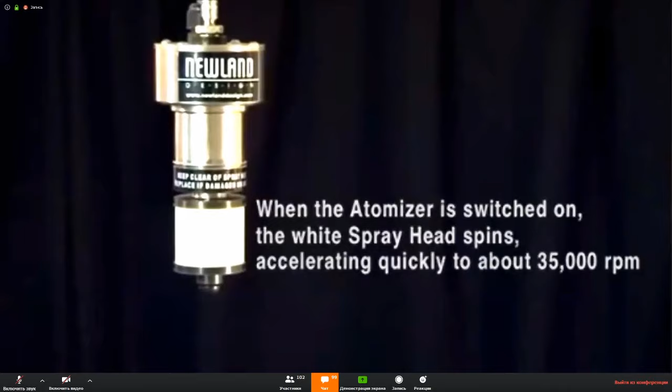The porous cylinder is made of polyethylene granules. The granules have an average size of 200 to 400 microns. At a speed of about 35,000 revolutions per minute, it sprays water into drops of 30-50 microns in size. If the spray head is clogged, it can be easily removed and replaced with a new one.

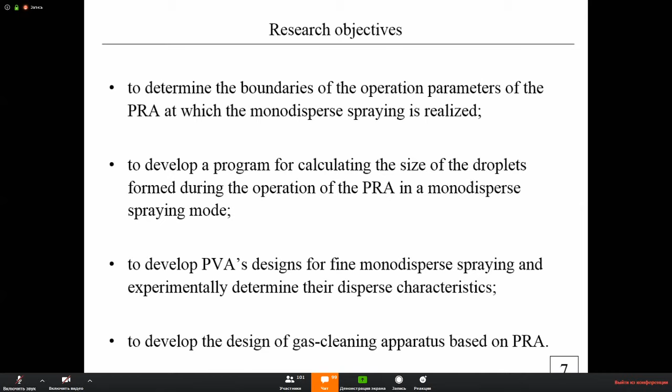However, there is no widespread use of porous rotary atomizers. First of all, because it is not known how to achieve monodisperse spraying. What are the droplet diameters obtained if different liquids are sprayed? How do droplets behave in flight? What are their trajectories in the apparatus? These objectives were set in this study.

So to determine the boundary of the monodisperse spraying regime, it was necessary to solve the problem of the fluid flow rate in the thickness of the atomizer wall. The slides show the statement of this problem.

It was found that this speed depends on many factors: on the properties of the liquid, such as density and surface tension, and others; on the geometric parameters of the atomizer, such as granule size, packing, wall size, and others; and of course on the rotation speed. As a result, a nomogram was obtained to determine the limiting speed of rotation at which droplets will be formed individually on each grain of the atomizer.

The experiments with sprayers of abrasive materials with a grain size of 200 and 400 microns were carried out on the setup shown here, using the method of photographing the spray. The determination of droplet diameters showed that when the calculated rotation speed was reached, the spray becomes close to monodisperse. You can see here.

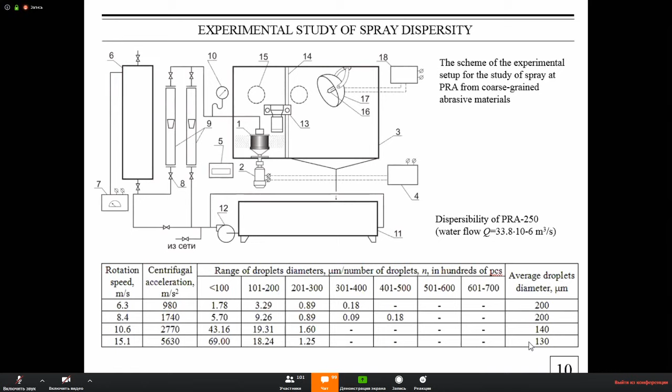In experiments with sprayers made of porous filtering ceramics with grain size of 50 to 60 microns, droplets were captured in an immersion medium. It can be seen that in the experiments, more dispersed droplets of 20 to 30 microns in size were obtained.

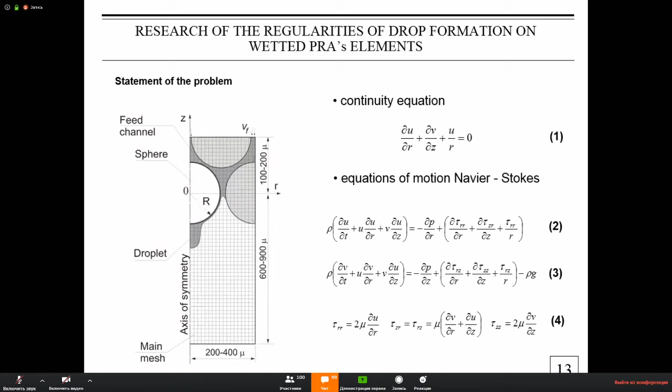To answer the question of why droplets from sprays of different materials are obtained this way, we performed a numerical simulation of droplet formation on granular models. The granule is spherical. We formulated the problem with the corresponding boundary conditions and performed numerical calculations using the CFD modeling package. Here are the main results.

If the grain has a conical shape, then the satellite is very small or not formed at all. We also made a simulation of a printed head with a pushing element inside. Such a design is promising for the formation of droplets in viscous liquids or melts.

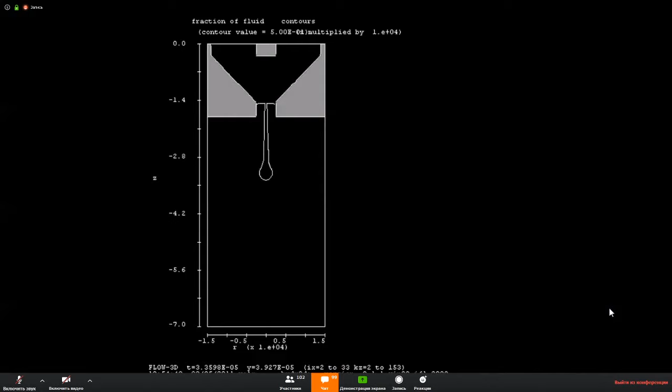After the first experiments, we performed numerical calculations of the formation of droplets in a centrifugal force field. Here, the simulation results are presented on spheres with a size of 100 and 200 microns at acceleration values from 10 to 100,000 meters per second squared, which is typical for the real work of porous rotating atomizers.

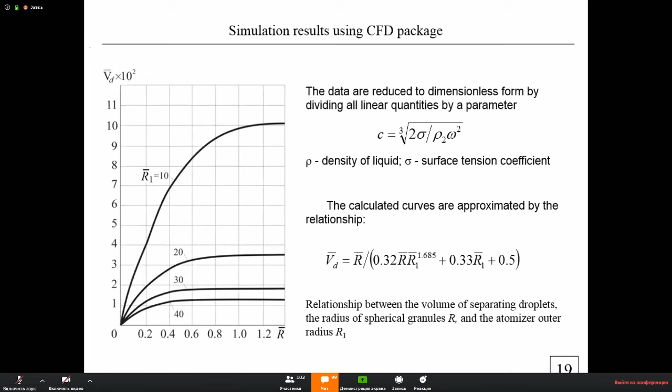As a result, graphs were obtained for determining the size of the droplets depending on the grain size at different speeds of rotation of the atomizer.

This is important information for spray technology developers. No less important is the information on the trajectories of droplets in apparatus based on porous rotating atomizers. It is necessary that the drop fully reacts with the gas being cleaned. What time will it take? Will a drop evaporate in flight? How far does it fly? These questions are important for designers.

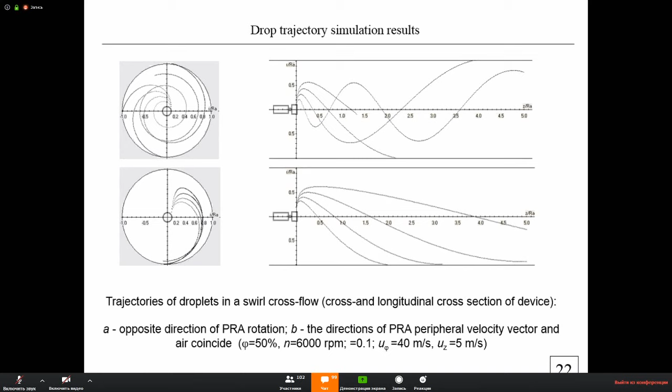Here are calculated droplet paths depending on the initial diameters, gas parameters, and apparatus dimensions. The time of flight of droplets to the apparatus wall was calculated for different directions of rotation of the atomizer and gas flow.

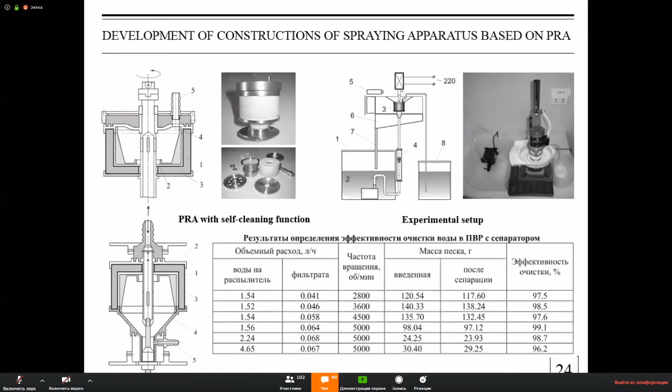The last slides show the developed designs of atomizers and devices based on them, which can be very promising. In particular, using porous rotating atomizers in air conditioners, you can increase the controllability of the humidification process and reduce the size of the spray chamber.

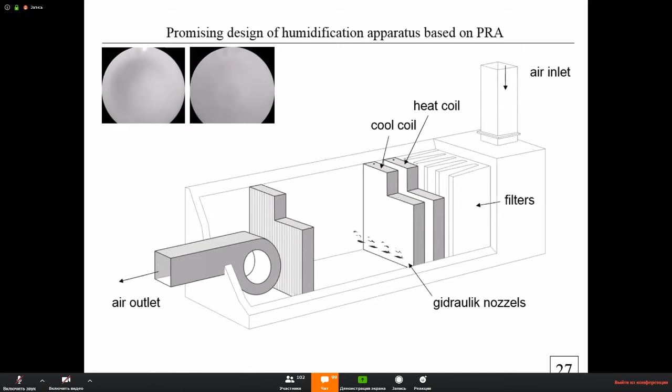If nozzles are used, the spray composition is very polydisperse, so a chamber length of up to about 2 meters is usually required. If you use a porous atomizer with almost uniform droplets, then a droplet separator is not needed, and the chamber length is significantly reduced.